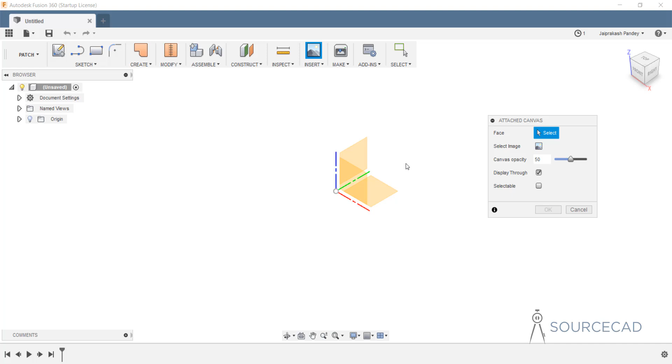And it's now selected. Now click on this image icon and locate that image. So in this case, I already have my image on the desktop. So it's going to prompt me with this open window. So I have a desktop selected here. I'm going to select bottle and open.

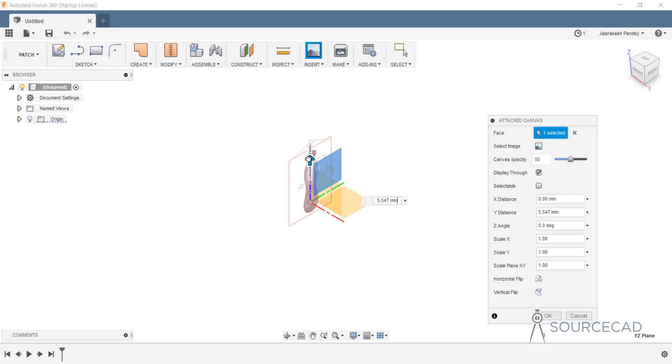Now, once inserted, the image will look like this. Although this is not a very clear image, we'll still work with this. We need to just calibrate its size and move it properly. For this case, let's just use this move tool to move it approximately at this point, and I'm going to click on OK. All right.

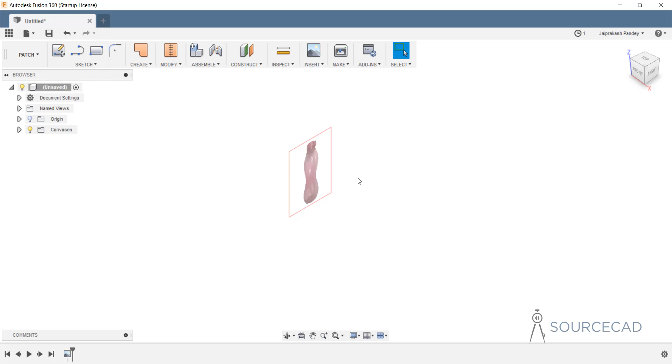Now the first thing that we need to do here is change the size. So let's assume that the total height of this bottle is like 300 millimeters, and we'll use that as a reference to make this. Now to set the size, we need to use the Calibrate option. So before that, I'm going to go to this right view so that the bottle is clearly visible. Now I'll go to this canvas option. I'm going to expand it from the browser, and there you'll see the image. Select, right click, and select Calibrate.

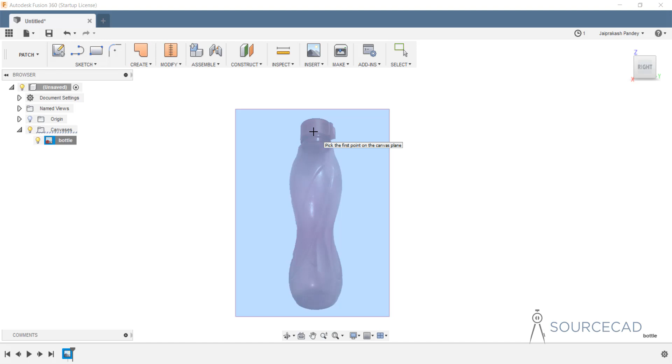And now we can define 2 points. So I'm going to select this point here as the first point, and then another point right here. Now this distance should be like 300 mm. So I'm going to type 300 and press enter. Okay, let's just zoom out. That's it. Now we can use this image as a reference, and then we can make our drawing with this. But first, let's move it properly with respect to the origin.

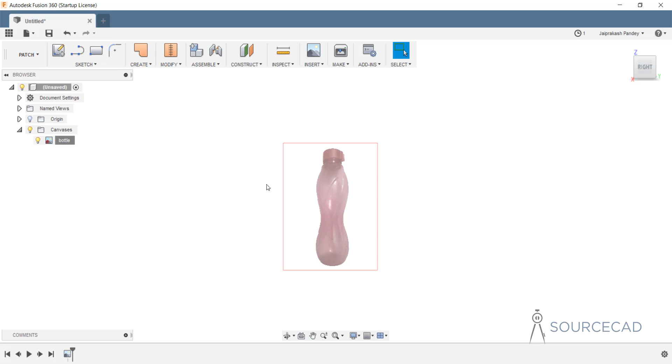So I'll go to this origin option, and you can see that this light bulb icon is off. Click on it to turn it on, and now you will be able to see the origin properly along with all the planes and axes. So once again, we'll move this image. So I'll select this bottle image from the canvas, and I'll select edit canvas. And once again, we have this move tool.

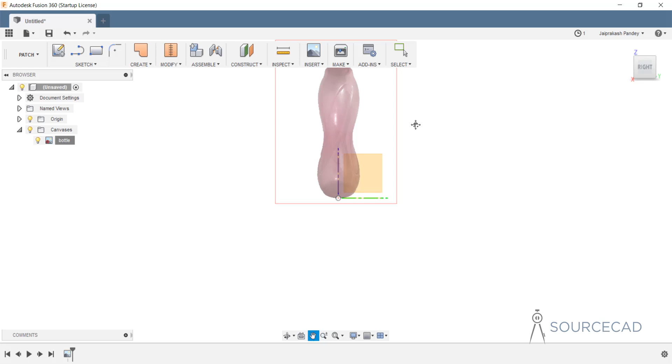So let's just move it up so that the origin is somewhere here. So somewhere over here, a little bit here and a little bit to the left. Okay, that looks good. So I'm going to click on OK. There we have it. Now let's start making our shape. And for that, I'll go to spline tool.

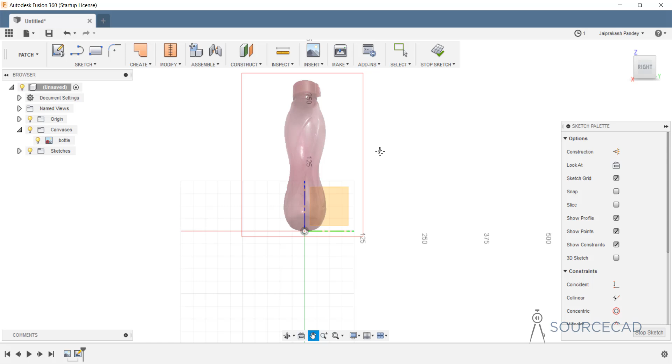So before doing that, let's select the plane first, and to do that you can go to this sketch option and then select your plane. All right, the plane is selected. Now we're ready to make our sketch. Now you can start your sketch from this drop down. Go to sketch and select the spline tool, and right here we have a spline, or you can also use the shortcut. So simply type S, and that's going to show you a sketch shortcut.

I already have some of the shortcuts added here, so I can directly select the tool from this list. But if you don't have the tool in this list, then you can also make a search for that. For example, if you type spline here, it's going to show you all the splines which are available. So in this case, I already have it here, so I'll select it from here. And now I'll start from origin.

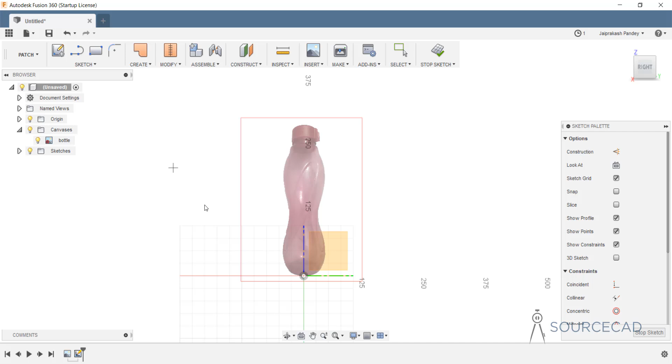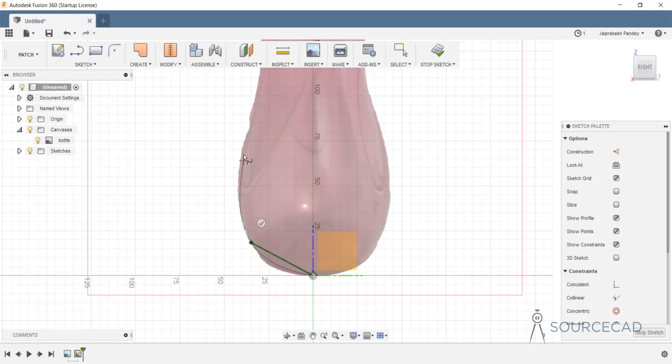Okay, let's press escape and let's repeat the last command. So here it is. So press and hold right click and drag your cursor up to repeat the last command. Now I'm going to click here at the origin. Let's zoom in and let's make a couple of points. I'm not trying to be very precise in this case, so I'll just add a few of these points, but not too many points.

That's obviously not needed. So just a couple of points here to give it the appearance that we need. That's it. And okay, you don't need to be very precise, and you don't need to make sure that this thing follows the complete curve. That's not at all necessary in this case. So just make a rough sketch that follows it. That looks kind of good. So I'll leave my cursor here and I'll press escape key.

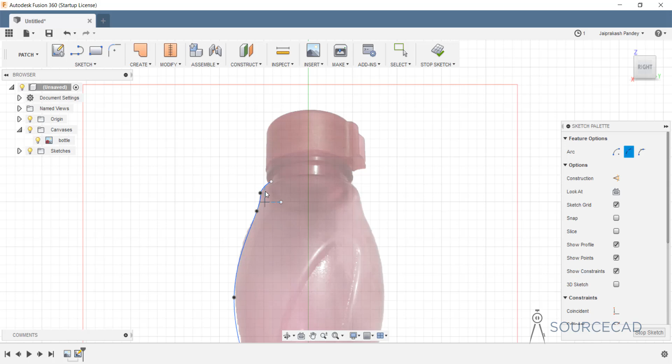Now we can use another curve to complete this, and for this I think arc will be perfect. So again, type S, and here we have this 3-point arc. So now I'm going to click here, first point, and the second point somewhere here, and the third point around here. That's it.

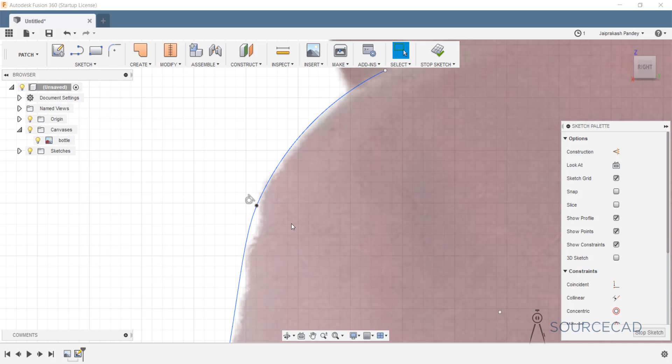Now we have a sharp corner here with respect to this spline and this curve. We just don't have a smooth transition between these two, so we need to take care of that, and for that I'll add a constraint. So I'm going to select this and this, and I'll go to tangent and I'll apply that constraint, and look at this. Now we have a smooth transition between these 2 points here, and we have the tangent constraint. Obviously it will affect the remaining part of the curve, but that we can take care of in a moment.

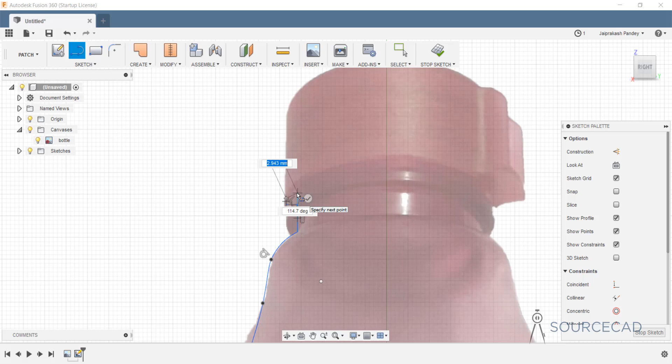Now let's add other part of this. So I'm gonna go to line. Now I'll click on this point. So the first thing is this distance, then I'm gonna move it a little bit to the left and up, and approximately to this angle. Again, you don't need to be very precise in this case.

And once again, we need to just move up, maybe up to this length, and well, that's enough. Now we can exit this. So I'm gonna click here to exit this command. All right, and I'll press escape.

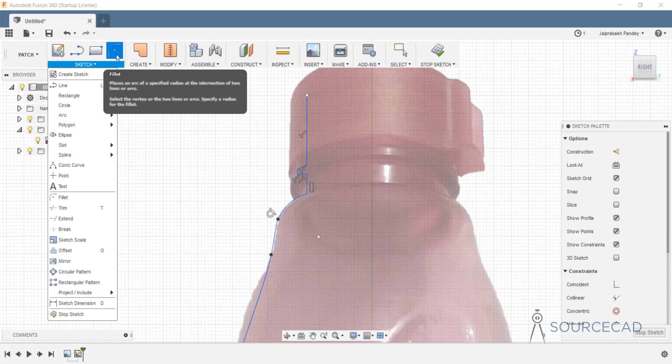So here also we have a sharp curve that we can avoid, and to do that, first let me just select all of these here, and I'm gonna move it a little bit to the right, just like this. Okay, and now I'm gonna add a fillet. So here we have the fillet tool. Obviously you can go to sketch and select the fillet tool. I've already added the fillet tool here, so I have it available here. If you don't have it here, go to the list and select fillet.

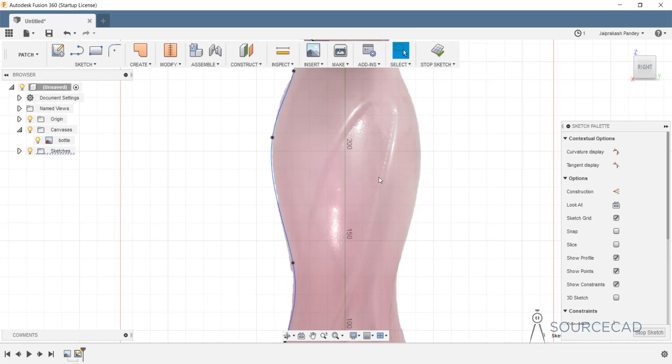Now I'm going to click on this, and let's add a fillet of 3 unit and press enter. Okay, that's done. Now let's modify the overall curve here. So we have this curve pretty good, and not that much of modification is needed, but still I'll try to make it look good, and I'll try to make it as precise as possible with respect to the background image that we have. So I'm going to just modify it a little bit like this, and that kind of looks good. Okay, so we'll just leave it here.

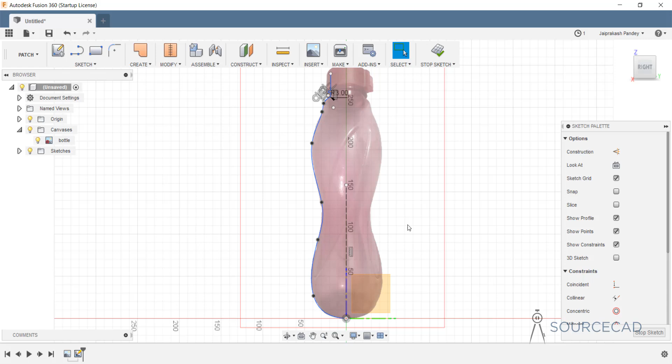Now let's make another reference curve here. For that, I'll go to sketch, and I'm going to click on this origin, and I'll make a single straight line like this. Okay, press escape and click on this reference line and select construction. Now that line is converted into a construction line, which we'll use in a moment. Now let's click on this stop sketch.

So now go to create, revolve, select this profile here that we created, and for the axis we need to select this construction line that we created, and that's it. Now simply click on OK. There we have it. Okay, so the profile is created, but it's not very clear because of the background image. So you can increase the transparency of background image, or you can hide it completely. To hide it, just click on this light bulb icon, and you can see the profile, and the bottle shape is kind of clearly visible. We just need to add some details here now.

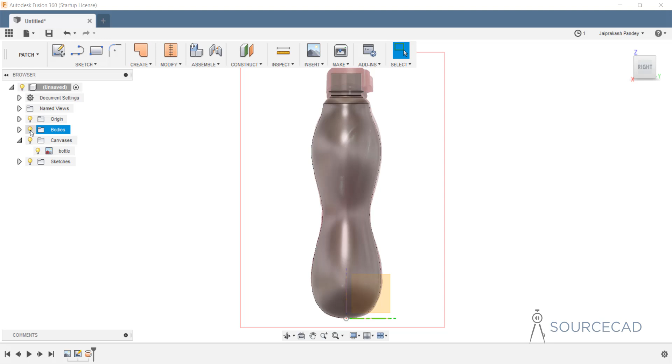So for the details, once again, I'm going to activate this. We need it here for now, and I'm going to start with this part here. Let's go to bodies, and let's just hide the bodies. And now you'll notice that we have this kind of shape here that we need to make. So I'll start with this one, and to make that kind of shape we need to first activate the bodies, and let's hide the canvas.

Okay, and now we need to make an offset here. So go to create and offset. Now we need to make an offset surface for this. So just select this one, and this is going to make an offset.

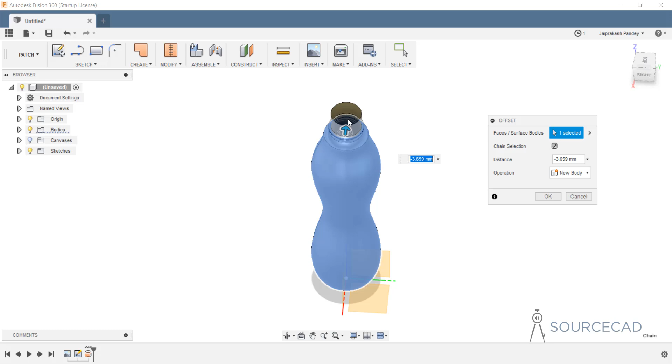And so maybe let's select the complete surface. So I'm going to just uncheck this. Okay, and again select this complete surface. Okay, now again move this arrow inside, and now you can clearly see the gap here. So just eyeball this gap, and in this case the gap is kind of like 1 millimeter.

So maybe we can add the number here also. So -1 and tab key. That looks good, so I'm going to keep this value. So enter, and that offset is now created. All right, so now let's make an offset plane as well.

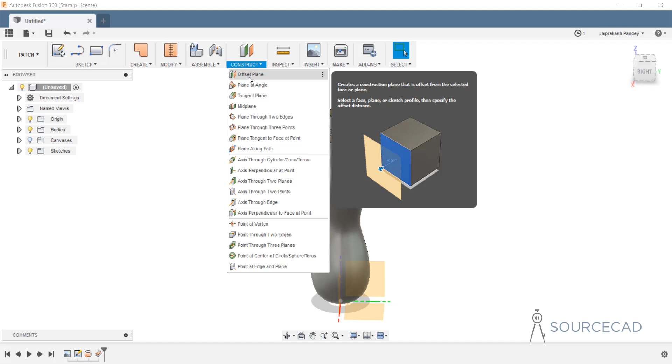So we have the canvas here, and we'll make an offset plane here. So I'm going to go to construct and offset plane. So select this plane, and let's just rotate this a little bit and move it out. Looks good. So okay, and our plane is now created here.

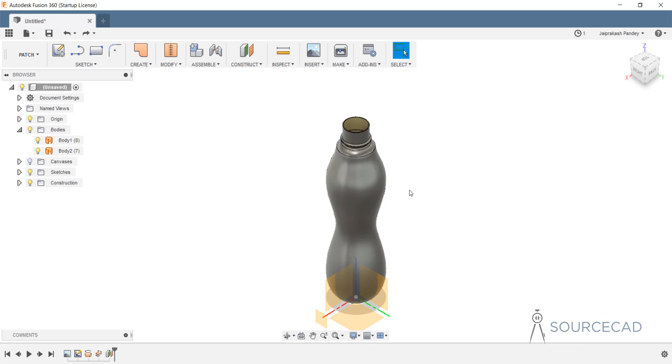Okay, so now we need to split this body in half, and to do that I'm going to go to modify, and I'll select split body. So we have two bodies, and we'll select both of them. So select this body 1 and body 2, and you can obviously select the object from this browser, or you can click here as well. So I've selected these two objects from the browser here, and you can see that these are now added here.

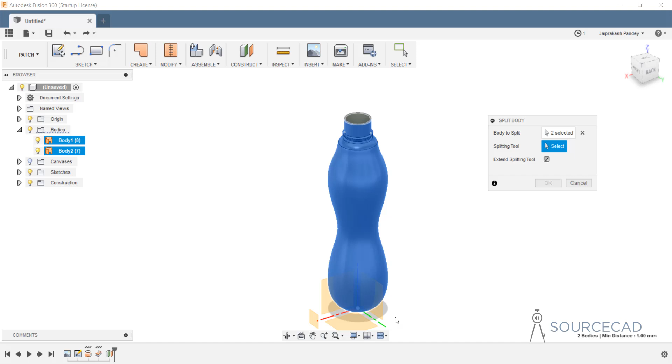Now we need to select a splitting tool, and for the splitting tool I'm going to select the plane on which we have the canvas. So this is the plane on which we have canvas. So click on this splitting tool and select this plane. Now you can see the preview here, the way it will be split, and just click on OK, and there we have it. So it's split in two different parts.

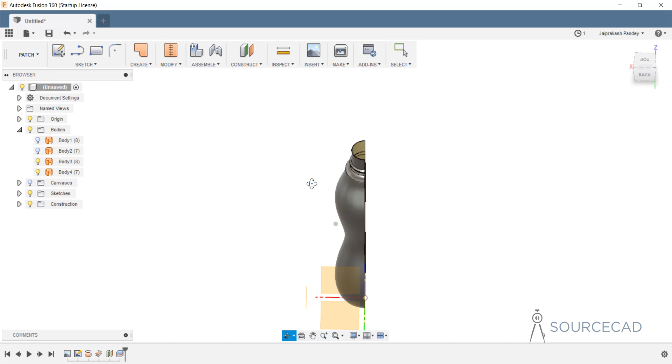So we don't need that half of the body, we just need one half of it. So there it is. Another half is no longer needed, and now we can make that shape. So I'm going to go to this plane and create sketch. On this plane we'll make our sketch, but before that let's activate the canvas. We need that now. There we have it.

The shape is barely visible here just because of this background image. So you can take the reference of that, or you can increase the transparency to see it more clearly. In this case we can work with this. So let's go to sketch and select ellipse. Now ellipse will be made here, and for that I'm going to start from a point.

Now whenever I'm moving my object here, look at this, it's creating these dotted lines. So these are the reference points which Fusion is automatically selecting. If you want to override that, simply press and hold Control key, and then Fusion will ignore all the references. Okay, now it will make your geometry without any reference point. So just click and hold, and now there we have it.

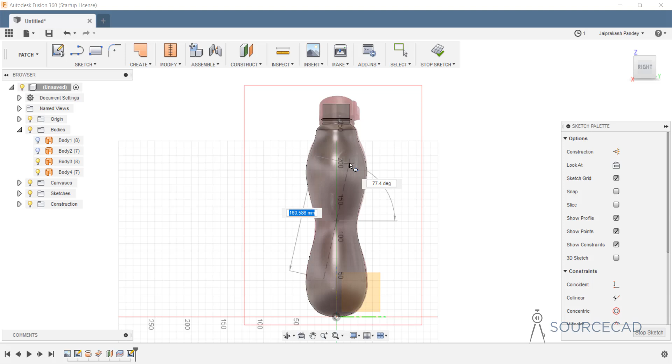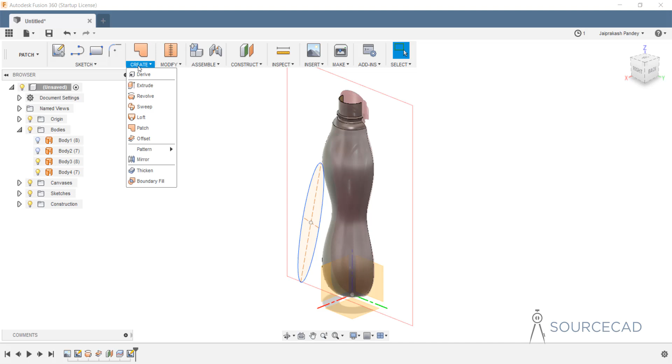Now I'm going to click here. All right, and just move out, and look at this. Now we have our ellipse. So maybe I'll just click right here. That looks good, and stop sketch. That's it. Now let's make another plane. So I'll go to create, extrude. This is the one which we need to extrude to this side.

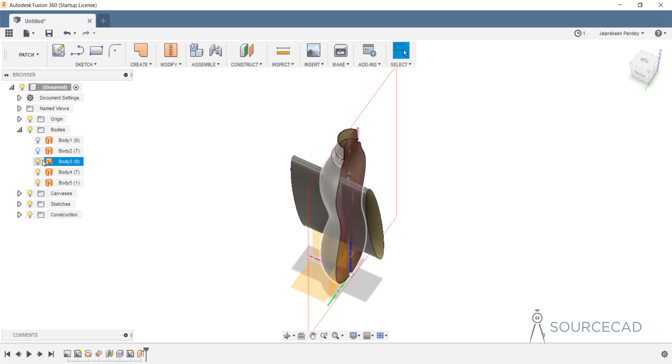All right, and okay. So now we have two offset planes, and we need to just trim it. We need to keep the part that we need, and we need to trim everything that is not necessary and that is not needed. So the first thing is canvas, just hide it. Now go to modify and trim. Now we need to start with the trim tool. In this case, the trim tool will be this object. We need this one as a reference, so select that.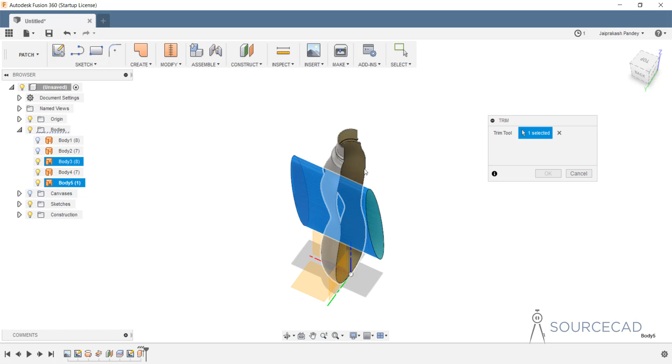Now select the part which you want to trim. We want to trim this part, so click inside this. Just make note that we have both the surfaces, so I'm selecting the surface which is inside. So click here and click on OK, and look at this. So that surface is now gone, and we only have a surface inside this. Okay, and everything outside is now gone. Let's repeat the process again.

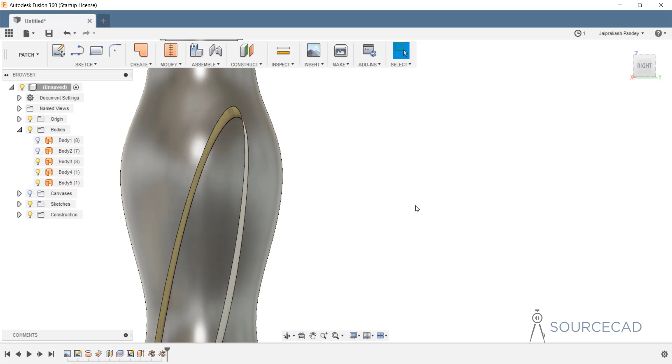So I'm going to go to modify and trim. Again, we have the same object as the trim tool, and in this case we'll select the part which is inside here as the body which we need to remove. So I'm going to select this one, and okay, there we have it. Okay, now we have it. Now we need to again repeat the process.

So we can do it in two different ways. We can either trim this part, or we can just use Loft tool here. So let's first try lofting this one. So I'm going to select this body 5, this trim tool, and I'm going to hide it. So that's now gone, and look at this.

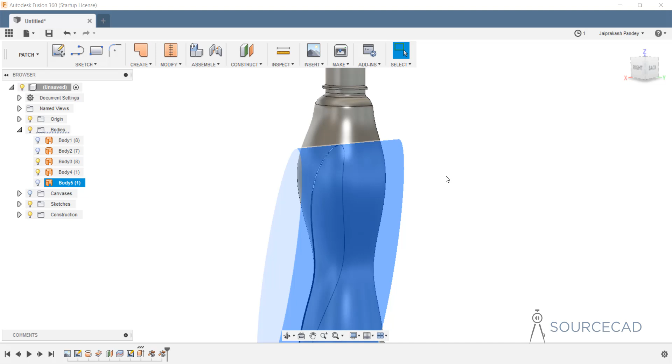Now we have both of these surfaces, but there is a gap between them, and you can clearly see the gap here. Just look at this. We have a little bit of gap. To fill this gap, I'll use Loft. So I'll go to create and I'll select Loft. Now I'll select this one, this profile, and the second profile right here.

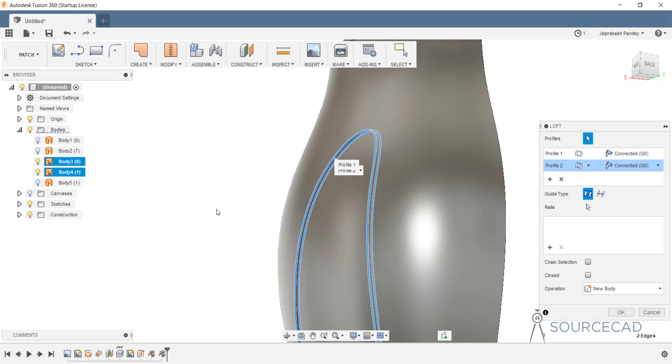Okay, both of them are now selected, let's click OK, and the loft is created.

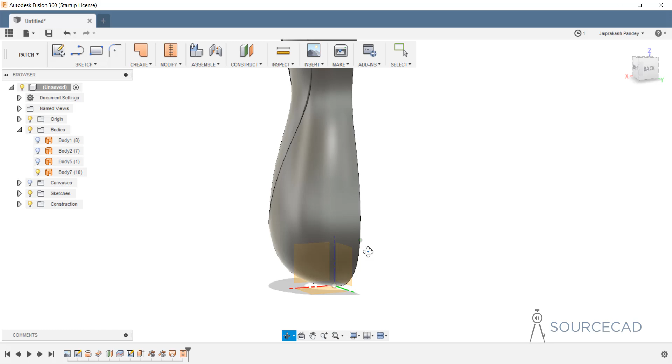Alright, so now let's add other details here. I'm going to start from this part. The bottom of this bottle should not be like this, otherwise it won't be able to stand on its own, so we need to take care of that. For that I'm going to select this plane right here, go to sketch, and make another sketch.

So once again I'm going to go to arc, and select 3-point arc. I'll start from this point here, the second point should be here, and I'm going to add the third point maybe here.

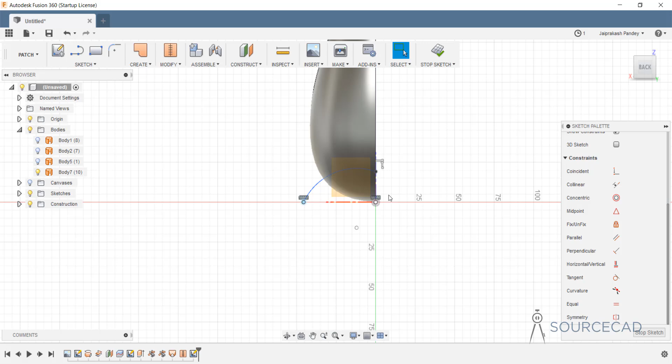Okay, we need to constrain this one properly, and change a little bit here and there. The first thing is these two should be collinear, so select both of them, and make sure they're horizontal like this. This one is obviously vertical, so you don't need to change anything there, but we need to make sure that this one is tangent.

We need to ensure that this is exactly straight here, which it is not, you can clearly see. So for this case I'm going to make these 2 points vertical. Select the center and this point and make sure it's perfectly vertical like this. There we have it, now this is going to take care of that.

So now we can increase the curvature here, maybe a little bit like this, just a little bit more. That seems good. And now just stop the sketch.

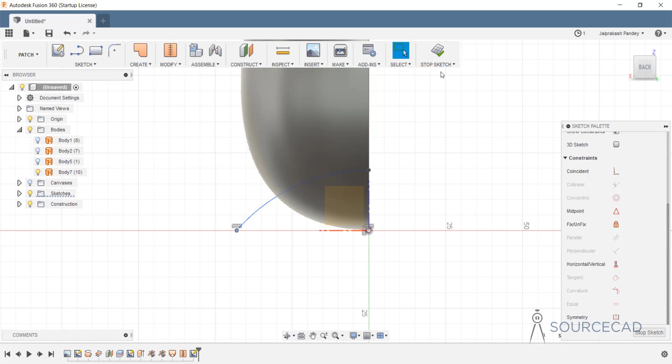Okay, and once again we'll make another profile. I'm going to go to create, revolve, select this one, and for the axis once again select this construction line, and there we have it. Okay, it's also created.

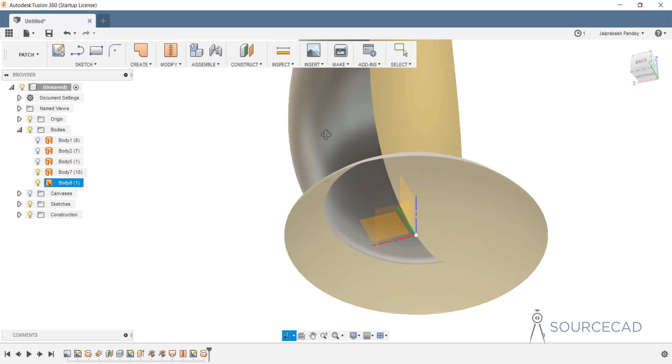Now we need to again get rid of this, and for that, go to modify and trim. This one is the trimming tool, and this object needs to go, and okay, that's trimmed.

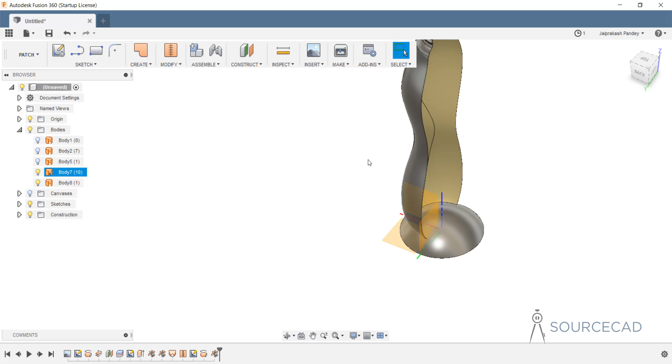Now we can just get rid of the remaining part here in a moment after making the symmetrical shape on the other side, but before that let's try adding the fillet here.

So we have the sharp curve, and I'm going to go to modify and fillet, and let's add a corner here. This is the sharp corner that we want to use here for the fillet, and let's add a little bit of radius here. That doesn't seem to work. We have an error message here, so even with very small radius, Fusion is not able to make it. So let's just leave this fillet tool for now.

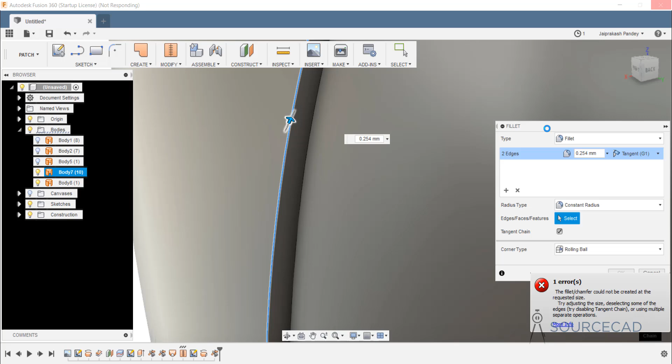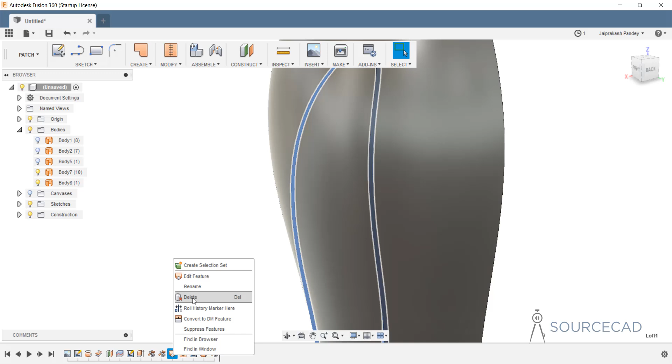And I'm going to cancel it out. Now instead of adding this loft, maybe we should try trimming. So we have loft here, which is way back inside this drawing. I'm going to go to that, and just delete this. So just select and delete.

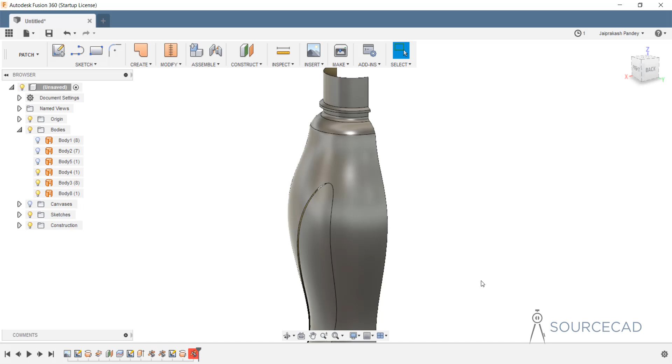Now this stitch tool will show an error message because it is dependent on that, so we need to delete that as well, and we have the gap now. We have a problem with the surface trim, but that will be fixed automatically. The surface trim problem is related to this part, that will be fixed, don't worry. But first we need to take care of this.

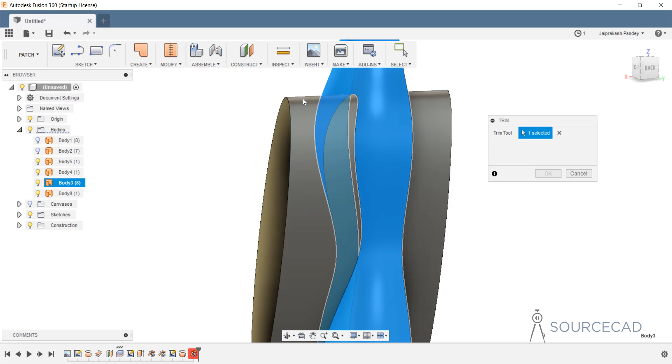So I'm going to activate this body 3, this one, and again use trim tool. I'll go to trim, select this one as trim tool, and click here as the object to trim. There we have it, it's gone.

And let's do it again for this one. I'm going to go to trim. In this case, this is the object, the trimming tool, and this is the one that needs to go, and okay. So there we have it.

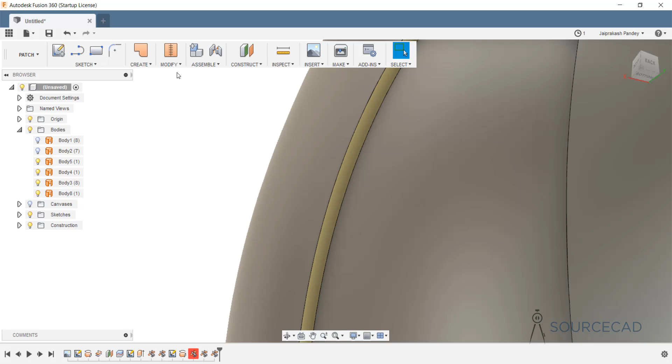So we now have this gap here, which is merged. The color is different because its direction is reversed, so we need to reverse that as well. I'm going to go to modify and reverse normal, select this plane and click OK. That's going to reverse the direction of this plane.

Now let's try adding fillet again. I'm going to go to modify and fillet, and now this edge, and it won't let me do that because we need to first stitch them together.

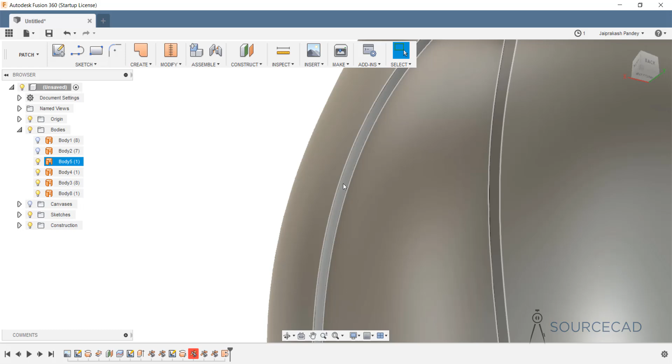So again, go to stitch, select this part and this one, and that's going to stitch them all together. Click OK. That's stitched.

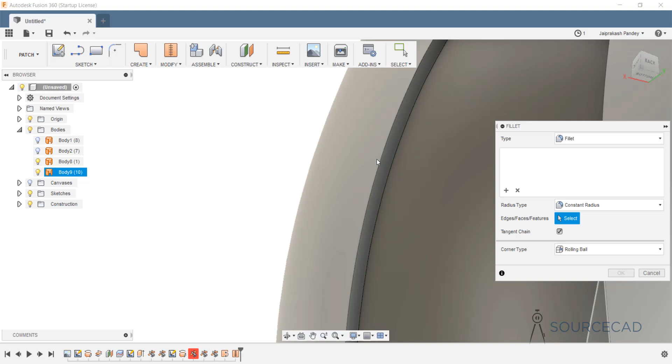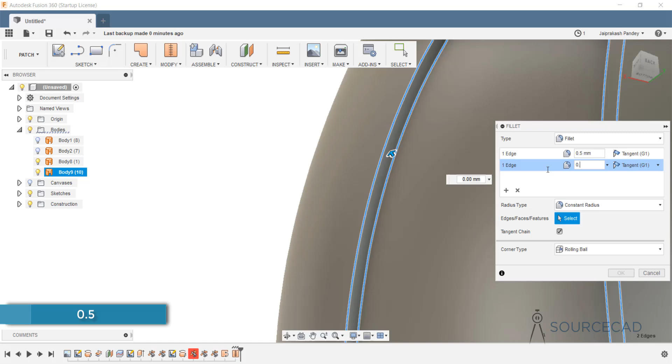Now let's try fillet again. Go to fillet and try this edge with a radius of 0.5, and that seems to be working perfectly. Now this is added. I'll keep that radius and add another edge, applying the same value. Let's zoom out to see this, and yep, that looks good. I'll keep this value and click OK, and that's added.

Now let's take care of this feature here. So let's modify this - right click and select edit feature. Once again we need to specify the properties. We need to first select the trim tool, so let's get rid of this first. In the trim tool we need to select this one, and then the object to remove is this. OK, and that's now fixed.

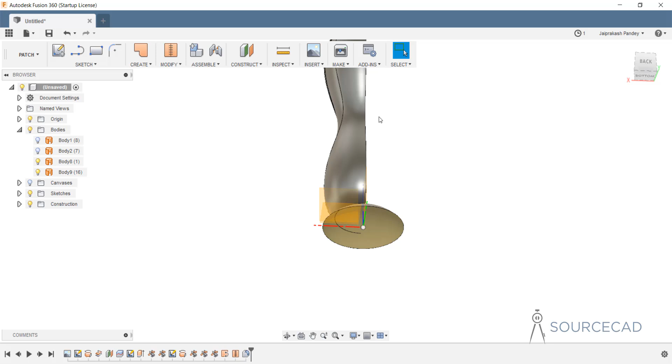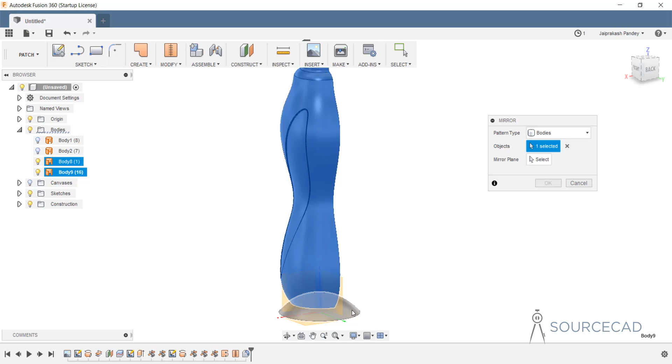Now we can make the mirrored image of this. For that, let's go to create and mirror. We need to make a mirror image of bodies, not faces, so I'm going to select bodies and select the objects - all of these. Just make sure you don't select this object, we don't need that. We just need to select this one, which is body 9 in this case. The mirroring plane is the plane which was the splitting plane, this one. Select that, and look at this - it will make the mirror image. Click OK, and we have this shape here.

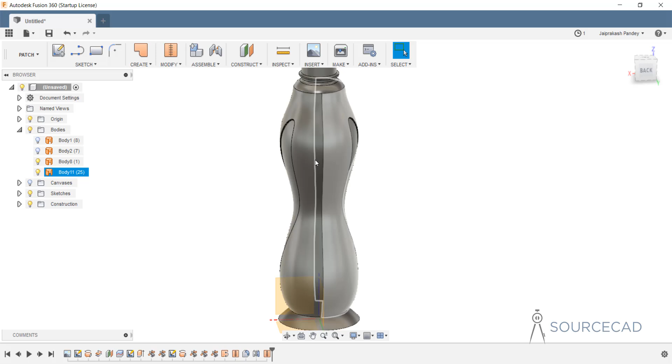Now we can just merge them together using the stitch tool. Again, modify, stitch, select them both, and OK. So now this one is combined into a single object, and now we can take care of this part.

Again, modify and trim. The trimming tool in this case is this bottle, and the object to remove is this part, OK. That's it. Again, you can clearly see the color is different - this one is a little different, which means the direction of the surface is reversed. We need to take care of that.

So again, reverse normal - modify, reverse normal, select this one, and OK. The direction is now proper. Again, fillet - modify, fillet, and this edge - but we won't be able to do that because we need to stitch it first. So again, stitch, select them both, and OK. Now we can do that.

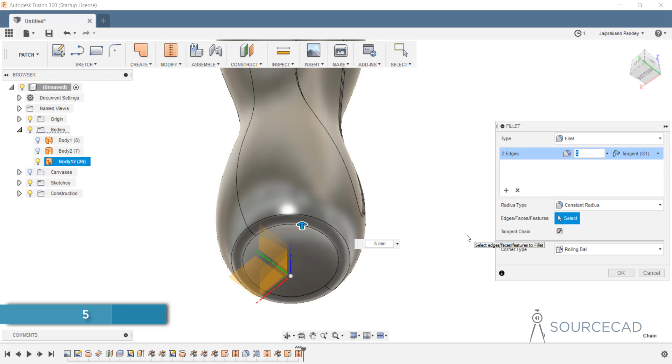So fillet this edge, the radius should be like 2 units. That looks good, but maybe we can just increase that value to 5. That looks way better than that one. So I'll just keep that value of 5, and OK. And there we have it - the base is done and the bottle is almost done.

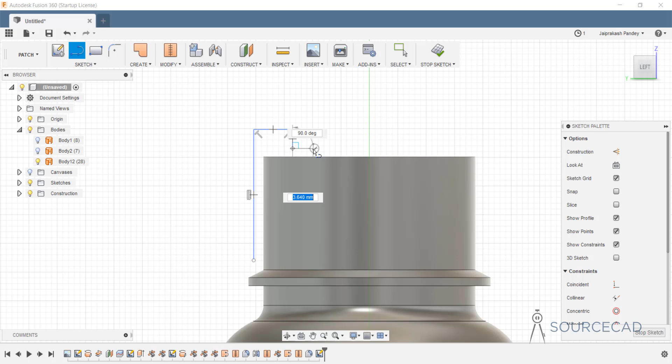We just need to add the cap here. To add the cap, once again we need to make the profile, and we'll do that on this plane. Select the plane and click on create sketch. Let's zoom into this area and make that using the line tool - starting from here, going somewhere here, like this, and here, zooming in a bit, and upwards right here, and we just need to finish it here. Okay, that's enough.

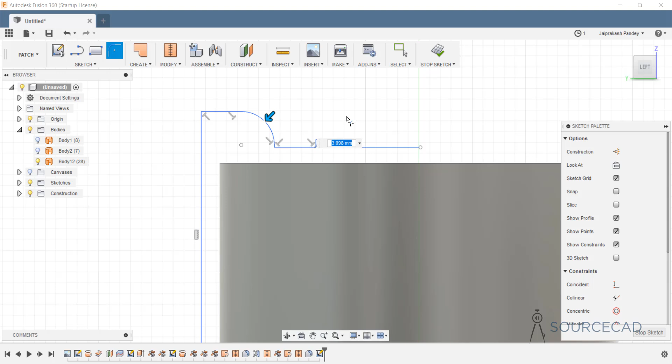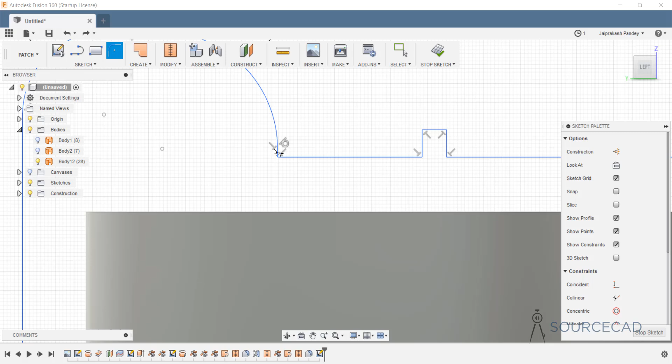Alright, we need to add a couple of fillets. So fillet this point, a little bit more like this, and enter. One more fillet just here, a smaller value of fillet - done. And really very small values of fillet here and here, just zoom in. Maybe we need to just change it again, okay I'll try that again. So fillet here and here, just a small value, and enter.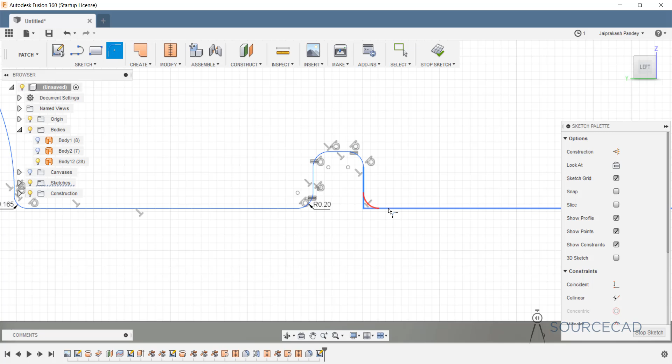In a similar way we need to add fillets here, so fillet all of these edges. Alright, looks good, so enter. Also we need to just ensure that this thing is exactly along this line, so just select that, and I'll select this point here, and make sure they are vertical - and now they are.

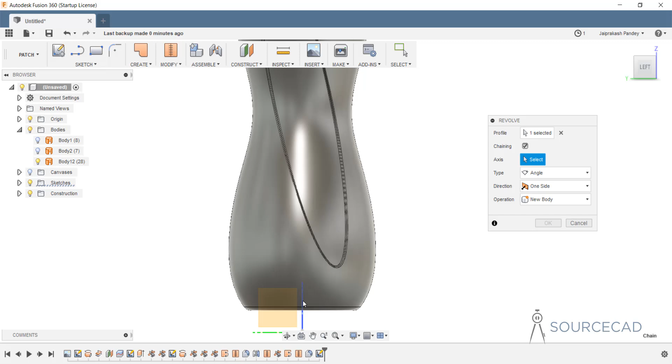So we can now convert this one again into a bottle cap. For that, again I'll go to create, revolve. You know the profile which we need to select, then the axis - you know that axis as well, and that axis is here, and that's it. OK, and here we have the cap. So the cap is also made, and everything is done.

Okay, so now our bottle shape is fully prepared, and we have the surface model here, and everything is made with surfaces or patches. But obviously in real life that's not the case. We need objects with some thickness. Surfaces have kind of zero thickness, which is not practical, so we need to convert this into a solid object with a finite thickness.

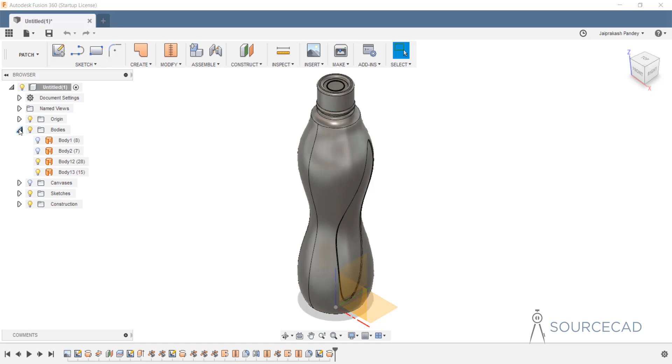Now to do that, you need to ensure you are first in the patch workspace, and we'll first convert this one into solid. I'll go to bodies and expand this one. So we have these two bodies, the visible one, the bottle shape, and the cap. Let's start with the cap, so I'll hide the bottle and we just have this cap visible.

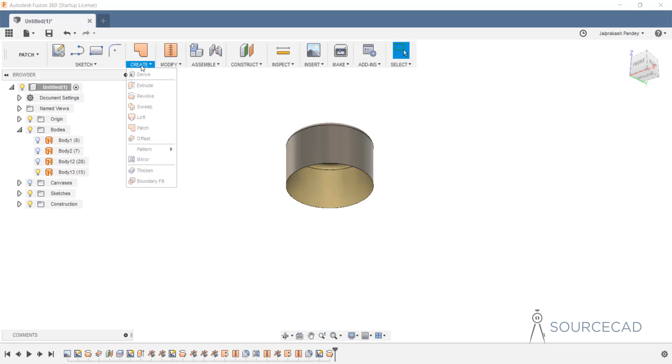Let's zoom into this area. I'll bring this into view, and now go to create and patch. We'll fill this gap here, select the edge, and click OK. Now this is a completely closed 3D solid, and we need to stitch it. So I'll go to modify and stitch, select it all, and OK.

As soon as you stitch this, Fusion will convert this thing into a solid object. Look at the browser now, body 15 is created, which is a solid object. Let's rename this one - that's the cap.

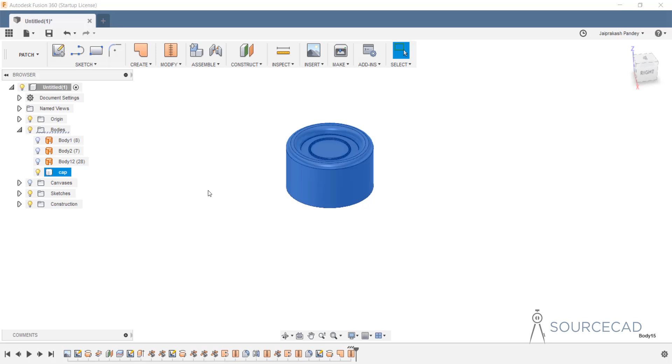Now let's do the same for the body. I'll make this one visible, the complete body, and hide the cap. We have the top one, so I'll go to create, patch, this one here, and OK. Once again, stitch, select it all, and OK. And again we have body 17.

We'll just rename this, and I'll call this bottle, or maybe we can just call this body. Now let's bring both objects here, and there it is. This is no longer a surface, it's converted into a solid shape, and we can make it hollow.

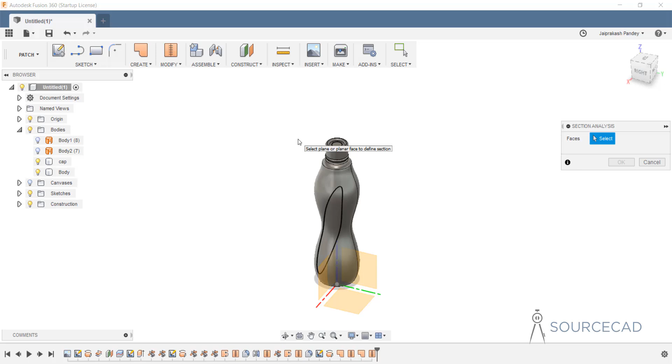Before we do that, let's add a section analysis so we can see what's going on inside. I'll go to inspect, section analysis, select this face for the sectioning, and look at this - now this is a completely solid filled object. These hatches indicate the area which is solid filled.

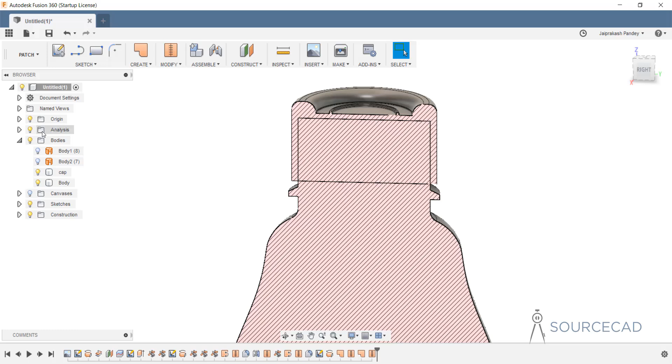Obviously that's not the case with a bottle, it should be hollow. So I'm going to click OK. We'll keep that section, and a new folder will be created here in the browser with the analysis name. Let's just hide this for now, and let's shell it out.

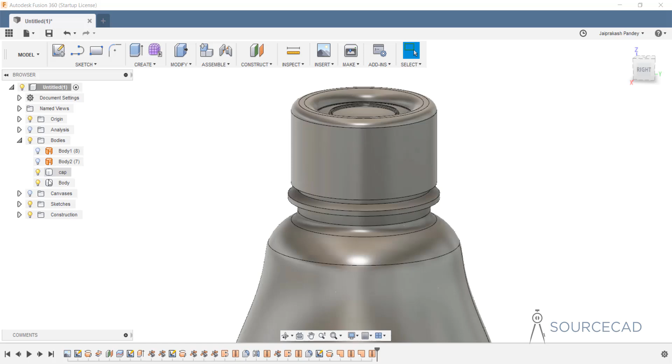To make the shell, you need to go to this model workspace. So once again, move back to model, and now one by one we'll shell this object. I'll go to bodies, and again start with the cap. I'll hide the body, and let's orbit this a little bit. I'll go to modify and shell, select this part here, just this part, and add the thickness of this shell.

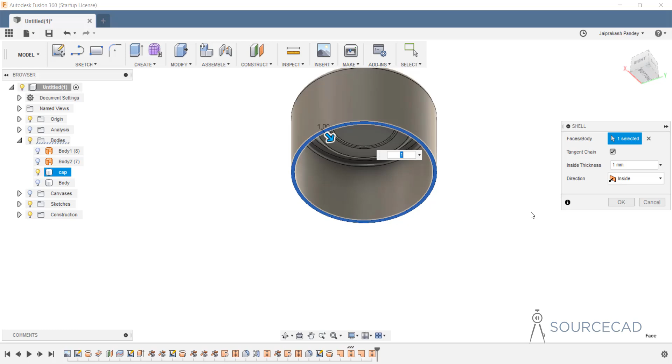So I'm going to add 1 mm and press tab key, and look at this - the shell is now created. Just click OK. And let's add fillets because this has kind of sharp corners. I'll go to modify, fillet, select this one, and maybe a fillet of 0.3 mm. That looks good, so enter.

Okay, we are done. Let's repeat the process for the other one. I'm going to hide the cap, bring this body here, and again modify, shell this part here, and this time let's make it 0.5 thickness, 0.5 mm. Looks good, so okay, and there we have it. So once again we can add fillets here.

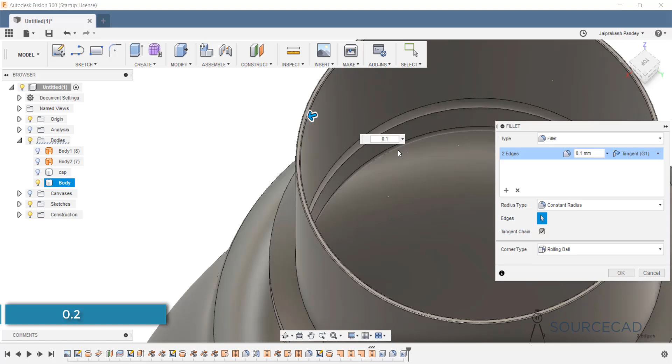I'll go to modify, fillet, this edge and this edge, and we can add a radius of 0.1, or maybe 0.2 is also fine here. Yep, that looks good. So 0.2 and enter - there we have it.

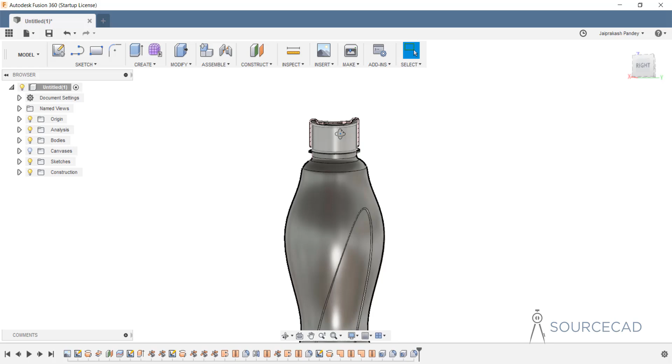So now we have this hollow bottle, and we also have the cap. Let's bring both objects here, and let's check the section analysis once again. I'll activate analysis, and look at this - now we can clearly see the sectioned area here. We have the sectioned area of the cap as well as the body, and everything looks kind of good here. We don't have any problem.

Maybe let's just look at this part as well. Yep, that looks good. So now the complete drawing is finished. Let's deactivate analysis, and that's our final bottle shape. So this is how you can make this kind of bottle shape with a combination of patch and model workspaces.

You can also make photorealistic images using the render workspace, which we'll not discuss for now. That's for another video.